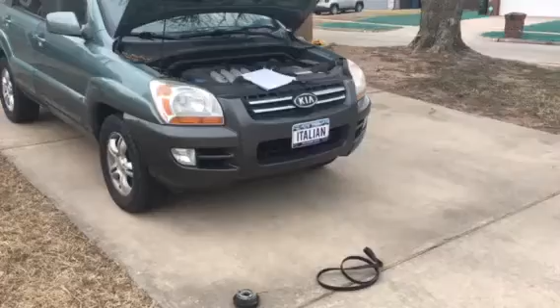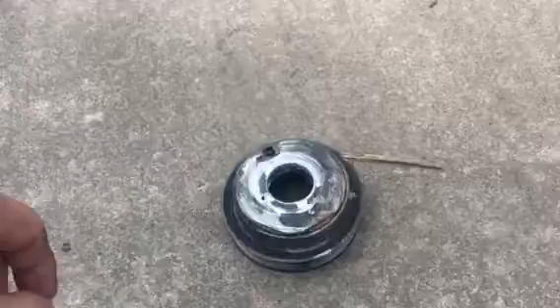This is a 2006 Kia Sportage with a 2.7 liter V6. I'm going to show you the parts and items required to install a bypass belt to bypass the AC compressor, which is also known as the air compressor for the air conditioning system.

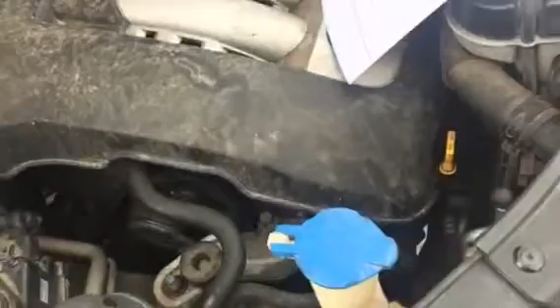The bearing on this one went out, and when it did, it took the serpentine belt out. When that happens, you've got about an hour, if you have a decent battery, before this engine will shut down. No worries, it will not overheat because the water pump is driven off of the timing belt. There is the shaft for the AC compressor. When this thing flew apart, parts went flying everywhere, half of which are still alongside the interstate, about 500 miles behind us here. I've got a drawing laid out here.

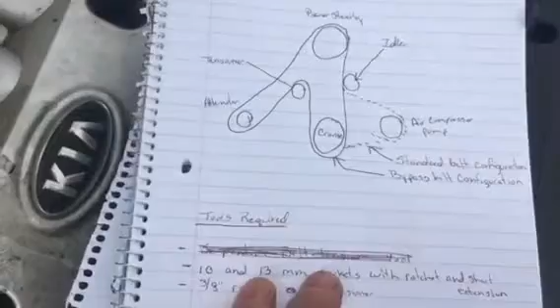This is the power steering pump. Down on the bottom is the crankshaft. So if you look at it like this, there's the power steering pulley, there's the crank pulley. These are all the pulley configurations as far as how they're laid out on the engine. The standard belt configuration would go around this way. A bypass belt would go this way.

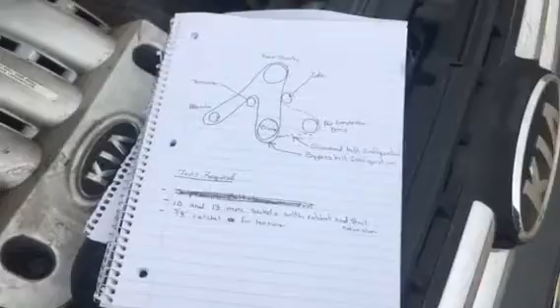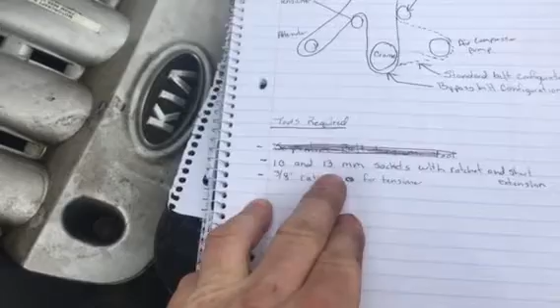As soon as this car shuts down, I'd recommend going straight to an AutoZone where they will have the parts and the tools to help you. In order to do this job, you're going to need a 10mm and a 13mm socket with a ratchet and a short extension, and you'll need a 3/8 ratchet for the tensioner.

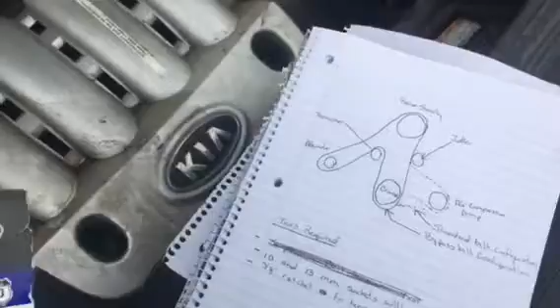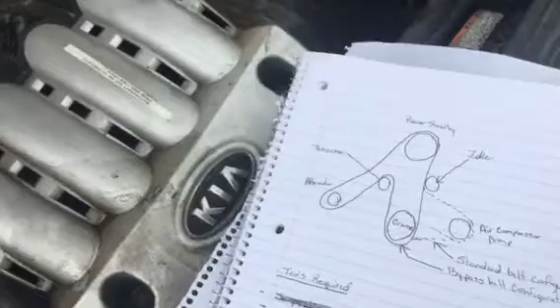So the first thing you want to do is... here's the belt. This belt is the same one that fits a Hyundai Tucson, the bypass for it, which is the same motor that's in the Kia Sportage. The reason they don't offer a belt for the Sportage is because that pump came stock. It's not an option as far as not having an AC compressor.

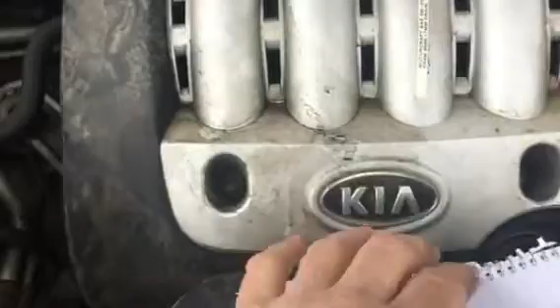So what you want to do is take your 10mm bolts out of your cover here. You got 4 of them, 2 on the back, 2 on the front, to give you better access to the side. Then you want to take the 13mm socket and remove this tensioner. You got a bolt on the top side up in here, and one down on the bottom.

You'll see the belt grooves are on the top here. You want to take the tensioner out, and you'll have to pre-install the new belt into the tensioner and then reinstall the tensioner. Once you get everything in place, make sure that belt is installed properly into the grooves. It shouldn't be overhanging any of the pulleys.

There's a square head, 3/8 hex head in that tensioner. What you'll do is stick your hand down through here, take that ratchet and push it downward to provide additional tension so you can install that belt over all the pulleys. It's about a 15-20 minute project.

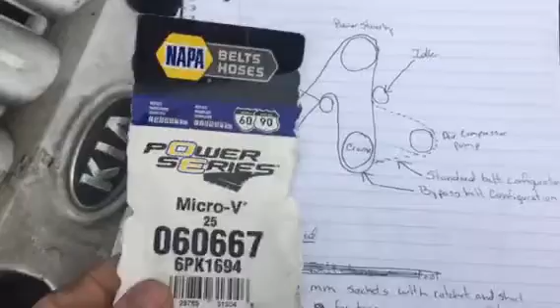So I'll show you the configuration again. The solid line is what the new belt's going to look like. And again, there's your tools, and here is the belt. This belt came from Napa. They can cross-reference it and get you one at AutoZone. Again, I'd go to AutoZone and get this done where they have the tools and the parts.

If you decide to get this fixed on the side of the road, you're looking anywhere between $400 and $600 for that pump. If you take it to a dealer, you're looking at about $1,800 to $2,500, and it's going to take them a few days. You're going to need a rental car, which probably isn't going to be conducive if you're on the side of the road, traveling, trying to get somewhere.

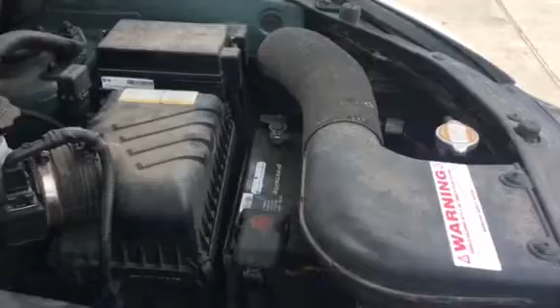Another option, if you didn't have the capabilities of doing any of this, is to buy a generator, and if you want to be redneck, set it on top of your vehicle and run a 12 volt charger over to that battery. Because since you don't have that alternator running, your car is basically running on borrowed time, usually about an hour. Good luck to you. Hope it works out for the best.